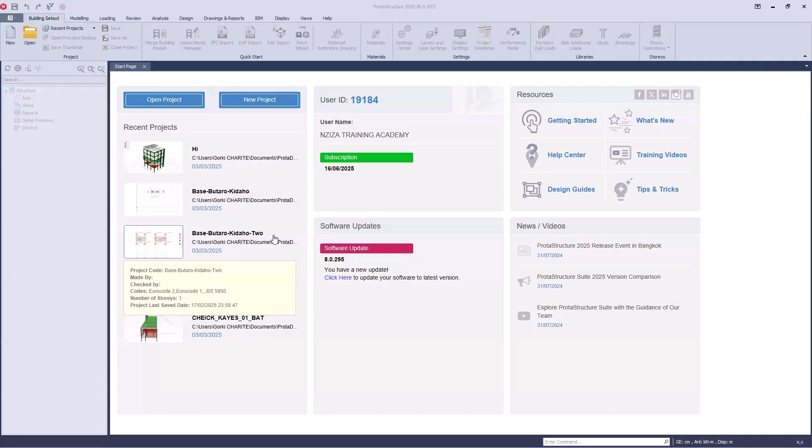Okay, so let's start by seeing the user interface of the software. Once you launch the software, it will open like this. Then, as other software, ProtaStructure has different tabs here at the top. Building setout is one tab. Modeling is another tab, loading is another tab, and so on. Whenever you open any given tab, you will see different tools here. The tools located under the loading tab are different to the ones under the modeling tab, and different to the ones in building setout.

So for now, you all know that we have different tabs, and in each tab we have different tools. We will take a look at all these tools in a few minutes. But for now, on the left side, you see that these words are somehow grayed out. They are not active because we haven't yet opened a project. I will talk about it in a few minutes.

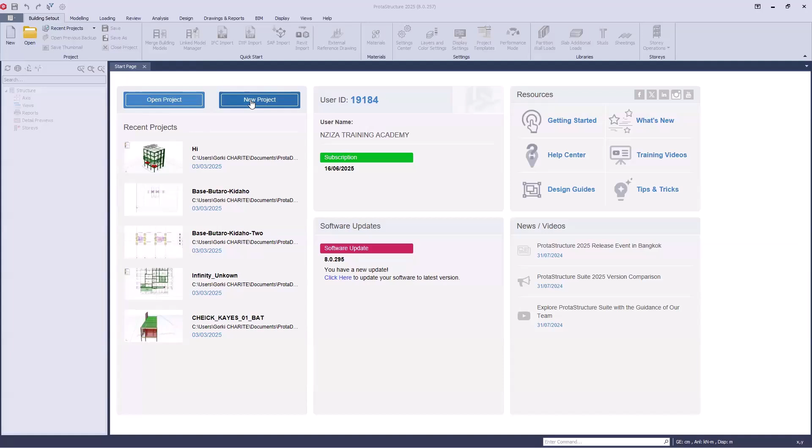So if there are no other questions, let's open a new project and see the full user interface. To open a new project, we will not use Open Project; we are going to create a new project. So please go to New Project and click this button. If you click on it, you will see this dialog box.

The first thing you have to put here is the project code. The project code is just the project name, so give it a name as you wish.

You will see that the space bar doesn't work. So if you have two words — for my case, I want to call it Training Morogoro, which is two words — to put a space between Training and Morogoro, using the space key on your keyboard will not work. If you want to put a space, you have to use this sign, the underscore. It acts like a space.

Then below, you'll see a list of different codes or templates. Depending on the code you want to use in your project, you will select one of them. For this demonstration, I'm going to select the British Standard Code. If I go all the way down, I will see United Kingdom BS code — so select the United Kingdom BS code.

So again, I will show you. We have to access the settings of the software. You have to go to the building setup, then go to the settings, settings center. Or another way.

Okay, so I understand. Some of you, because the screen of your laptops are small, have something like this. Let me try to make my screen a little bit bigger. So some of you have something like that, like this. This is because the screen of your laptop is small.

Okay, so let's go on. I was just explaining that under the building setup tab, the main tools you will find there will be about the settings. So we will go under settings center.

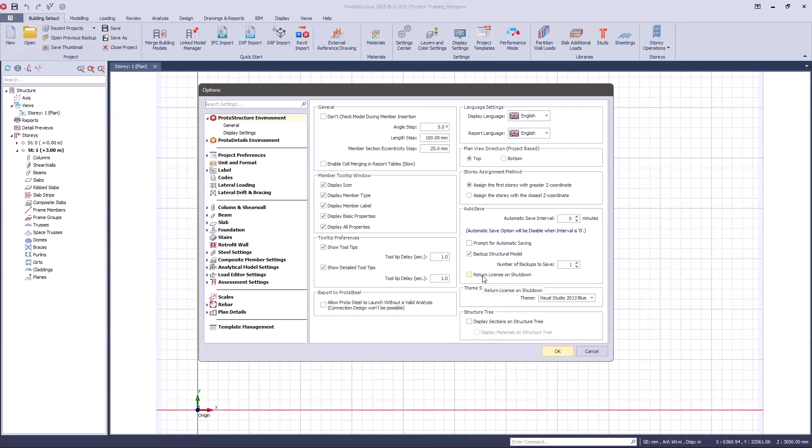So what we have done, it means the next time we will be opening the software, it will not ask you to put again the activation code. So it means when this is ticked, the return license is ticked, then every time you open the software it will ask you to put the activation code. So make sure that you have removed it so that the next time you close the software and open it again, it will not ask you for the activation.

Okay, good. So the next tab will be the modeling tab. Here, go to the modeling tab.

So the concept is, in the first tab we have set the settings. For our case, we only did this, but if you wanted, you would have gone under all the settings and set it the way you want. We're not doing that for now because we are on the starting point. We will be using default settings for now, but it is supposed that after this you set all the settings as you wish. If everything is set, then we'll shift to the modeling tab. For now, because we are beginners, let's not change anything regarding the settings.

Go to the modeling tab, click on grids. Wait a bit. Good. So let's go. Click on grid here. Then you will have this dialog box. I will put it somewhere here. This dialog box contains the properties of the command that you have selected. Again, I will repeat: I go to the modeling tab, click on grid, then you'll have these properties.

So let's start modeling our grid. Before I explain all these properties here, we'll start by creating one grid, then I'll come back and explain all these settings. To create a grid, it is very simple. Just click the starting point. You see I still have the grid command. Then click the second point, and a grid will be created. As simple as that. Click the first point, click the second point, the grid will be created. Good.

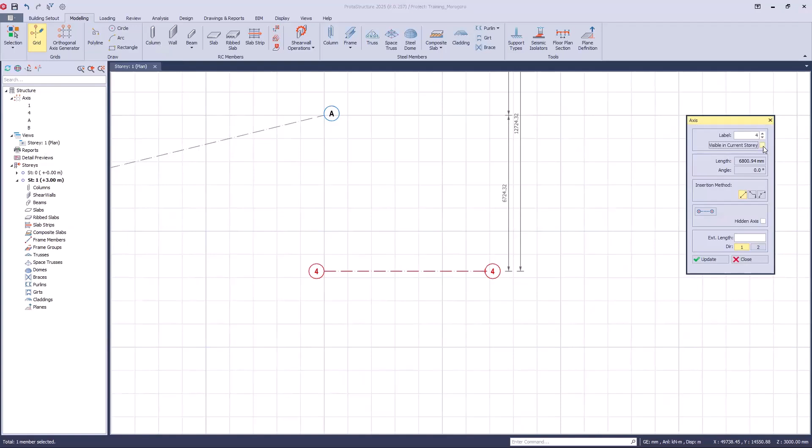To show you the difference, take a look at this grid here. For now, it is in a blue color. If I select it and click on visible in current story, you see now it is in a blue color. But if I go back here, deactivate visible in the current story, and click on update, just see the difference. You see now it is no longer in a blue color. It's like it is hidden somehow. It is not visible in this story. Okay.

Good. So depending on the project we are working on, you may want some grids to be somehow hidden in the current story. Maybe you have created those grids just as a reference, so you don't want them to appear after you do a printout of the document. So in that case, you can use this command. Okay.

So how to get the properties of this? We have different ways. You can select the grid and right click. If you right click, you will see properties. If I click on properties, then the properties of this grid will appear. I will repeat it: select a grid, right click, then go to properties. Okay.

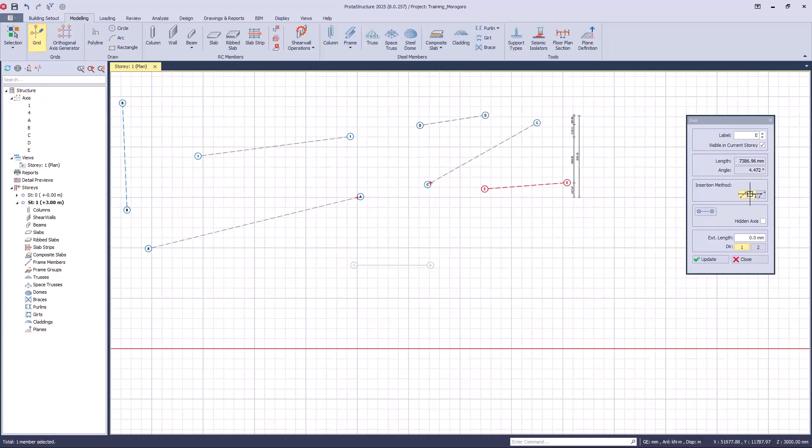Okay, so you have seen the difference between the first one, single segment, and the one which is a multi-segment. Then the last one, the third box, is curved axis. So if I activate this, I would have to take the first point, select the second point, then define the length of curvature. This is distance from here all the way to where, is it upward, is it downward? Okay, then I will click. Then I will be able to create a curved axis.

I will repeat it. Click first point, second point, then define this length here. Okay, so those are the three main insertion methods we have when we are modeling axis. Okay, so take like 2 minutes to explore on your computer. Try to draw the axis using these three options so that you can see the difference between the single segment and multi-segment and the curved axis. So please do it on your computers. Let's take 2 minutes, then I will continue explaining the remaining properties. Can you try?

Okay, so if you have a problem, online people, write it in the chat box. For the physical participants, I will be happy to assist you. Okay. Okay, so let's go on. There is no question so far. So

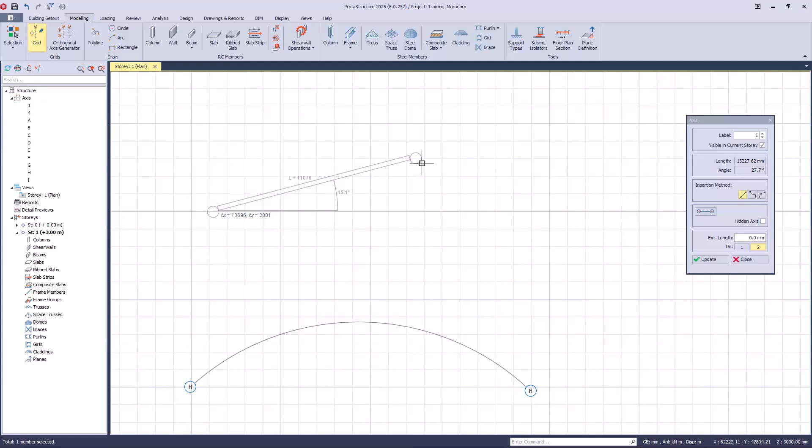After selecting the grid, selecting the insertion here, select the first point. Before selecting the second point, you'll click on the tab key on your keyboard. So if you click on tab, okay, not tab, F2 on your keyboard. If you click on F2 on your keyboard, then you can type it manually using your computer. Okay. Click on F2. If F2 doesn't work, it means depending on the arrangement of your computer, maybe you must press the function key before pressing F2. Okay. Sorry. Okay, can you try?

So press F2 on your keyboard, then you will be able to add the value of the length. If you want to change from the length to the degrees, to the angle, then you have to click tab. Okay, then if you click on tab, then you will have also the value to put the degrees, then enter, then your grid will be created. So right.

And participants, if there are any questions, let me check. Good. No questions so far. Okay, good.

So let's go on. I will repeat this last action that I demonstrated. So after choosing the grid, okay, then you have to select the first point. If you want to control the length of the axis, just press F2 on your keyboard, put the length that you want. Okay, if you want to shift from the length input to the angle, click on tab on your keyboard. You see the tab shifts between the angle and the length. Okay, then also put the value of the angle, maybe let's say 0, and click on enter, then it will be created.

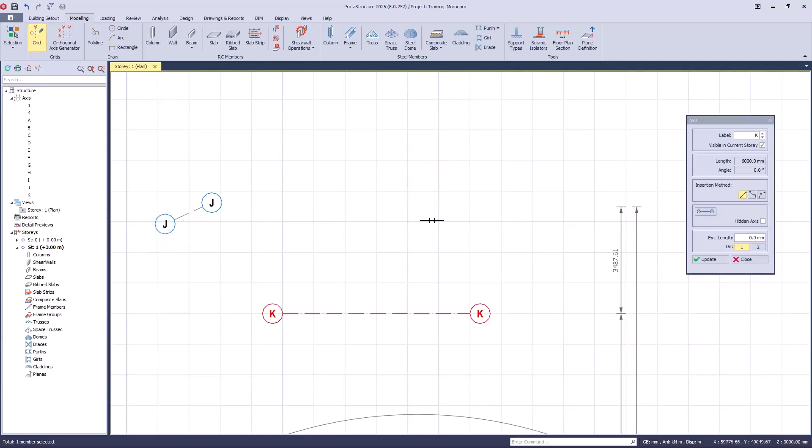Okay, another thing, okay, most of the time we are not concerned with the length of the axis, but we have to be precise with the angle. Okay, so if you want to draw a straight horizontal axis, which has 0 degrees, you have to keep in mind that in ProtaStructure we are always measuring degrees taking the x-axis, the horizontal axis, as the reference. And we measure the angle in anti-clockwise direction. So anti-clockwise direction is the positive direction. So if I click here, it will be 0. So starting all the way like this, going in anti-clockwise direction, it will be in positive directions.

So if I go all the way down, it means in clockwise direction, I will have a minus, a negative. Okay. So if you want to draw a straight axis, instead of using F2 and changing the angle to 0, you can hold down the control key. If you hold down the control key, now you are sure that this axis is straight to the horizontal axis.

If you want to create a vertical one, in order to make sure that it is well aligned at 90 degrees, you have to hold down the Control key. So if you hold down the Control key, now it will be straight. If you don't hold the Control key, you may think that it is straight, but there may be some angle.

For instance, let's take it like this. If I try to zoom or open its properties, you see now it is not exactly 90 degrees. It was almost 90 degrees. So to make sure that you create a very straight one, click the first point, hold down the Control key, then click, and now you'll be sure it is 90 degrees. Or if you are creating a horizontal one, now you'll be sure that the angle here is 0. Okay.

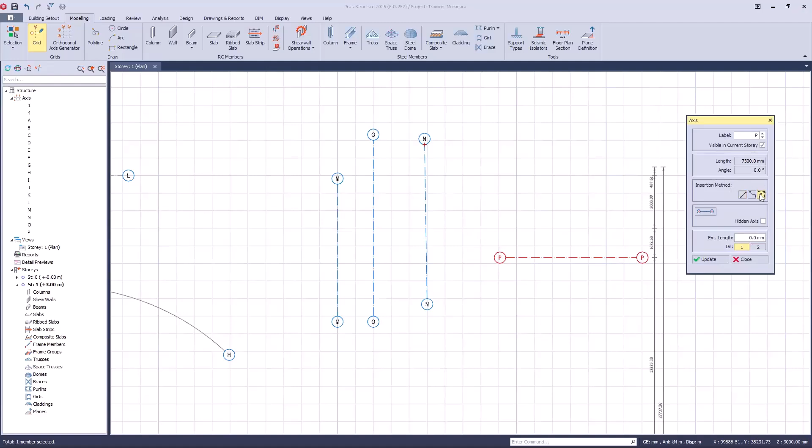So this scenario also applies when you are modeling the curved axis. You remember, for the curved axis, you have to click the first point, the second point, and then define this length. So by defining this length, you may press F2 on your keyboard, so that you can put the exact value of this length here. Okay, so you can put the exact value using F2 on your keyboard. So try it.

Different kinds of grids. Let's take around 3 minutes. Then I will go on and finish the remaining properties here of the grids. Take like 3 minutes and try to go through the grid, and then I will explain the main property.

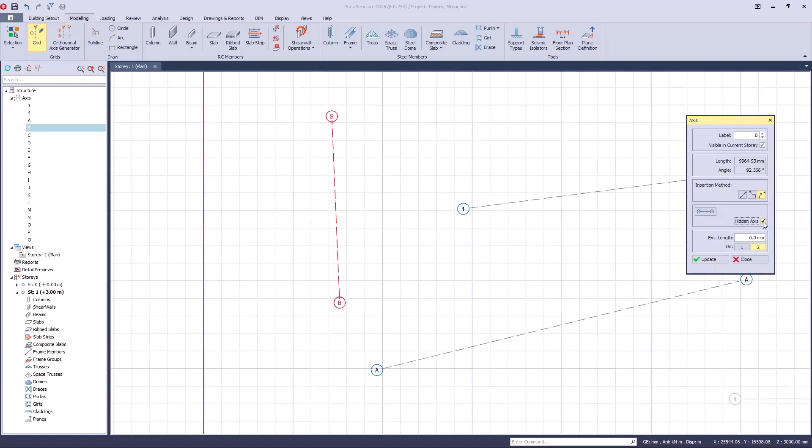Okay. So you can choose which one you want to remove. So this parameter here controls the heads of the axis. The next parameter is to hide the axis. So in this case, if you click on hidden axis and update, you see it will be grayed out, almost invisible, if I can say.

So the difference between this hidden axis and visible in current storey. If you hide using visible in current storey, the axis will be hidden only in that story. But when you choose hidden axis, then the axis will be hidden in all stories. And even when you go to detailing, that axis will not be visible. So whenever you are using an axis as a reference, you can hide it, and then it will not be visible in all stories.

Okay, this extension length, I will talk about extension length in a few minutes, when we'll be seeing how to work with orthogonal axes. I will come back to this. This direction 1 and direction 2, what you have to know: in ProtaStructure, direction 1 is always the horizontal direction, the x-axis, the x direction. The y direction, the vertical one, is direction 2. So please keep that in mind regarding direction 1 and direction 2, because we'll be meeting with it every time.

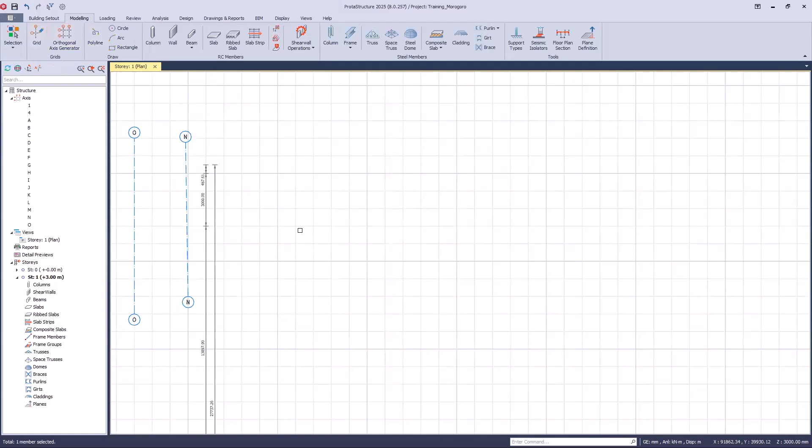That's one way. Second way is just to select it. By selecting it, you will see a delete button here. You can use that. That's another way. The third one is just selecting a grid, then click the delete key on your keyboard. Using the delete key on your keyboard, it will be deleted as well.

Okay. So if you want to delete multiple axes at a single time, you may select using a drag like this. If they are selected, then you can delete using your keyboard or by using this delete here. Click on delete. Then you will have this pop-up showing that you are going to delete the axis. Click OK. They will be deleted. Okay.

So for now, I will be deleting all the axes that I have, so that we can see how we can modify an axis. So we have seen how to draw it initially. Now we are about to see how to modify an existing axis. So if there is no question so far, then I will proceed and show you how you can modify an axis.

Okay, so how to modify an axis. So I will create an axis first. Let's say I have an axis here. Then I want to do some modification to this axis. There are a lot of modifying tools for an axis. So we're going to see them one by one. To access those modifying tools, we have again two options.

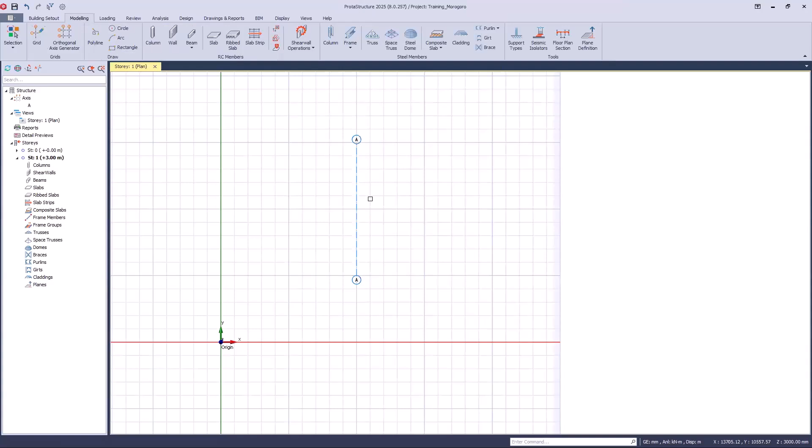The first one is the offset axis. Okay. If you click on offset axis, now you have this second axis. Do you want to offset on the right side or on the left side? You can use these values to know the exact length you are offsetting. If you want to type them manually, remember it is the same. Press F2, then you will have the option to put the distance between those two axes.

Okay, so maybe I will put 5 meters. Remember, we are working in millimeters, so if I put 5 meters, it will be 5,000. Click enter, then the second axis will be created, and you'll see that it will be named axis B because the first one was A. Automatically, it will be named axis B, but I still have the command.

So if I want to create axis C, which is also 5 meters away, it's a matter of clicking, I will still have the command activated and so on. If I want to terminate the command, just click escape on your keyboard, then the command will be terminated. Now I have created 3 axes having a distance of 5 meters, 5 meters. Good. So this was the first command, which was offset.

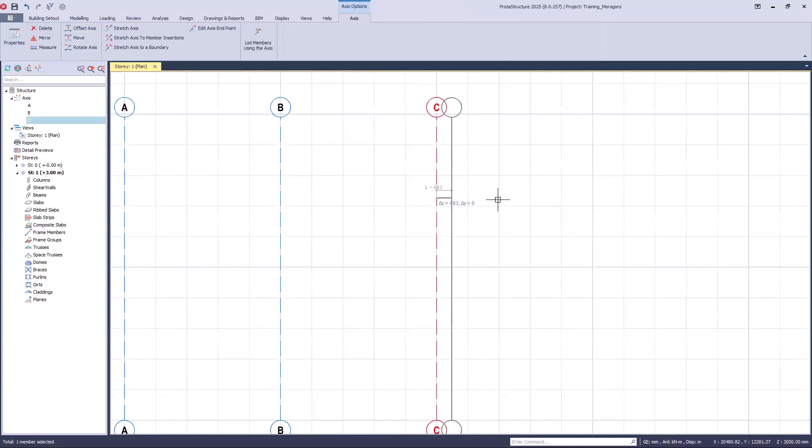But here there is a trick. I will try to offset again. Okay. So instead of offsetting an axis on the right side by 5 meters, I will offset on the left side. Maybe 2 meters on the left side. So in this case, this is very, very important. If I click F2, instead of putting 2 meters, I will put negative 2 meters, because we are going to the left side.

So I will have to put negative 2 meters, then click enter, then it will be offset like this. So when you are going to the left, it is a negative value. When you are going to the right, it will be a positive value. The same applies when you are going up or down. Moving upward, it is a positive value. Moving downward, it will be a negative value. You have to keep that in mind. Okay. That was the first modifying tool, offsetting.

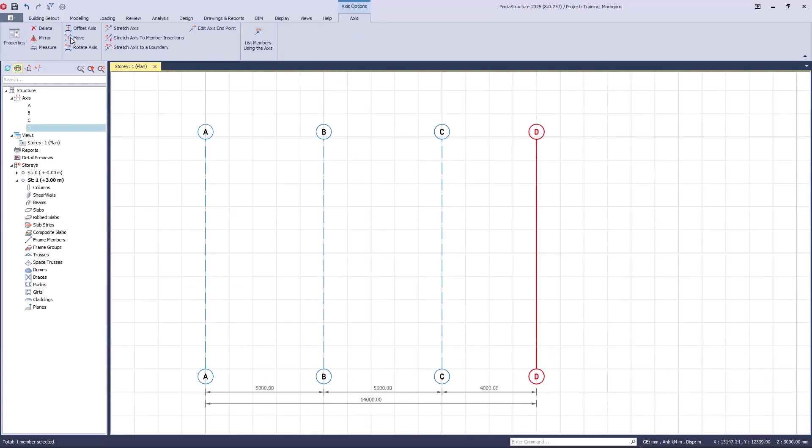Good. That's the only difference. So you can also try moving an axis. Select the axis, move, then define the length. If it is on the right side, it will be positive. If it is on the left side, it will be a negative value. Good.

So the next command will be rotating the axis. Again, select the axis, take the rotate command.

After clicking on rotate, you have to pick the base point of the rotation of your axis. I will pick maybe this as the base. I will click once, then I can start rotating. You see, I can rotate as I wish. If I click here, then the axis will be rotated.

Or we can place again F2 and fill the value. So try the rotation, and if it fails, let me know.

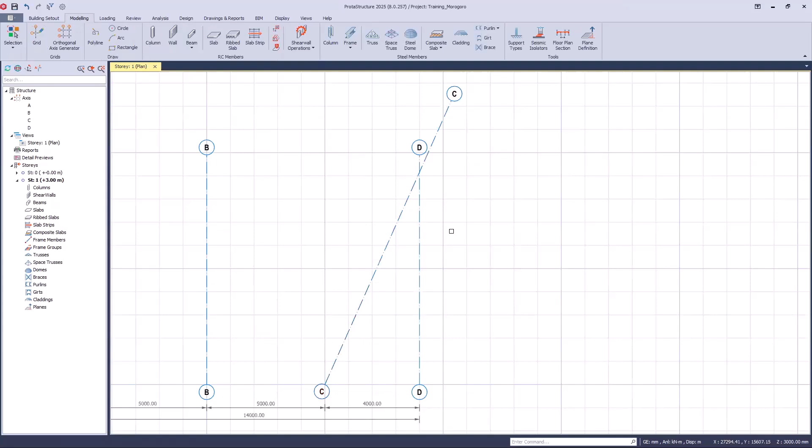Take the command, select the end where I want to stretch, this end for instance. So if I go down here, it will be shortened, or if I stretch by going up, it will be elongated like that.

This is applicable even if you select two axes at a single time. If you select them, click on stretch, it can automatically stretch two axes or multiple axes at a time, instead of stretching one by one.

Try the stretch. Is it okay? Can we move to the next one? The next one is stretch axis to member insertion.

This will not work for now, because to use this command, you have to have some members, maybe column or whatever place. We are not yet there, so we'll skip it for now.

Stretch axis to boundary. This is the same, but this can work. Let's have something like maybe something like this. Okay, so I have a member like this. I have a grid like this.

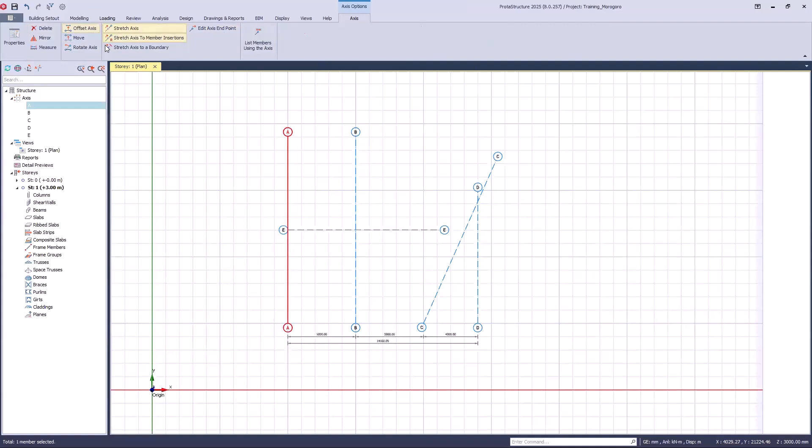Good. So, if it is okay, the last one was edit axis endpoint. We'll see it again later. So those were the main modifying tools that we will be using here.

So, is there any issue, any question regarding the modeling of axis so far? Either modeling the straight one, a curved axis, a segmented one, or modifying. Is there any question before we proceed?

Online, are we still together? For me, it's okay. Okay, good. How about others? If I don't see questions in the chat box.

But my problem is that I haven't received the software. Gilbert, you were a bit late. Maybe one of my colleagues will send you a link where you can download. David, can you please assist? Yes. Okay, good. You have, dear Gilbert, check your DM, your direct message on this chat box. Okay, I'll check. Okay, good.

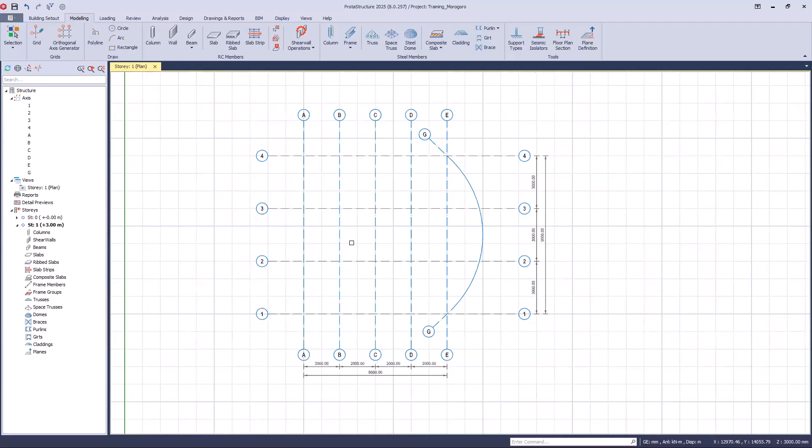Okay, good. So let's go with the last thing that I want to show you regarding the grid before we go for the break. You saw that it was not complicated to create this kind of grid, but I have realized that most of you it took you longer than necessary, because you were using like a manual way of modeling these axes.

What you did: you created the first axis, and then you tried to offset it, like 2 meters, I think. Then you offset it like this, then you drew something like this and offset it, and so on. That's how you did, and it was good, that's what I wanted to do. But I want to show you that there is an easier way of creating this kind of axis.

Instead of using a grid axis, the one that we have learned, we are going to see how to create an orthogonal axis generator, to create our axis using the orthogonal axis generator. This command will allow you to create a set of axes with a single click.

So how is it used? You have to go under Modeling, select the command Orthogonal Axis Generator. After selecting it, bring your cursor to the display and click somewhere you want. Maybe at this point, I'm going to click here. If you click somewhere, then you'll have a table. I'm going to explain this table so that you can understand what is behind the orthogonal axis generator.

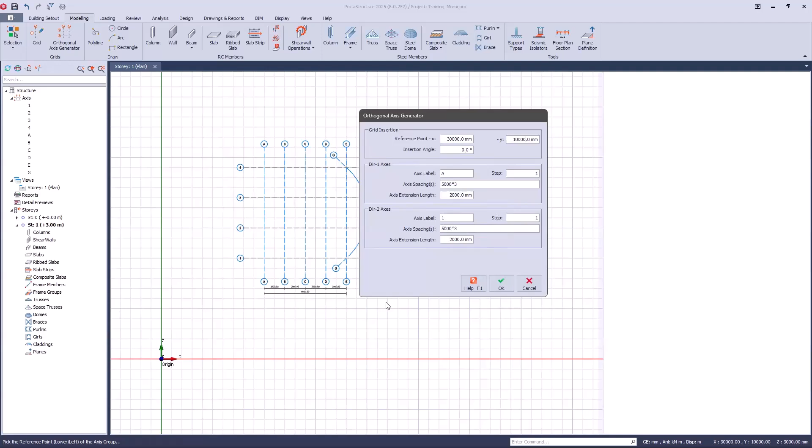So whenever you have this table, you have to take into account the parameters of direction 1 and the parameters of direction 2. Remember, direction 1 is always the x-axis, the horizontal. Direction 2 is the vertical axis. It means the settings I will be working on here will be for direction 1, which is these axes in the x direction. Then when I set the parameters of direction 2, I will be working on these which are vertical.

So I will zoom this again and repeat so it will be much clearer. I want to drag this almost here. You see, direction 1 here I have numbers, then direction 2 I have letters. You see, this A, B, C, D, and so on. So these are letters, and these are numbers.

So what I have to do under direction 1, it means these which are horizontal, under axis label, I have to put numbers. So I will put 1 instead of A, under label.

Please follow here. Okay, the next one is the spacing. I'm going first to work on direction 1 only. For direction 1, the label will be 1 to mean numbers, so I have put 1 to mean numbers.

Then I have the next point, which is axis spacing. It means the distance between one axis and another. So from axis 1 to axis 2, we have 3 meters, so I have to put 3 meters, which is 3000 millimeters.

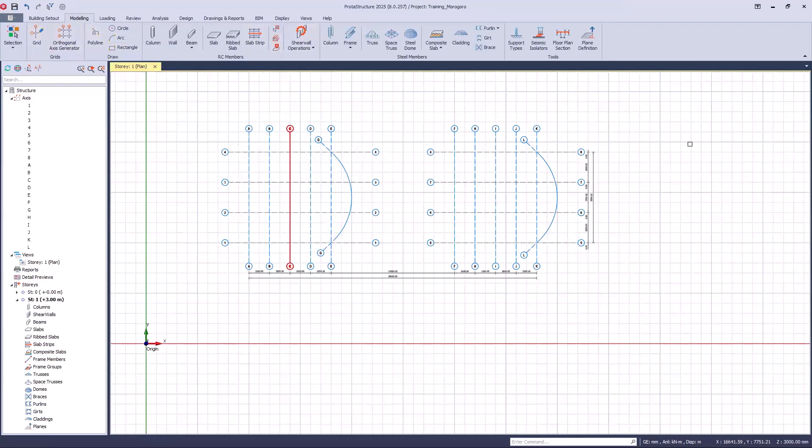Okay, so whenever you are dealing with creating those kinds of grid axes, you may use the orthogonal axis generator or this independent grid, depending on the result you want to achieve. The last thing I can tell you about this orthogonal axis generator, remember when we skipped this angle? For the angle, if I put, let's say, 45 degrees and click OK, you see it creates the axis but with an inclination of 45 degrees.

Okay, so if you are working with this orthogonal axis generator, but you know the distances are not always equal between axes, you have to put them here manually. So the first one is 3 meters, maybe the second spacing is 2 meters, the next one maybe 4 meters, and so on. You can come here and do the same. This time, if you click OK, you see the spacing between these grids are different: the first one was 3 meters, 2 meters, then the last one 4 meters.

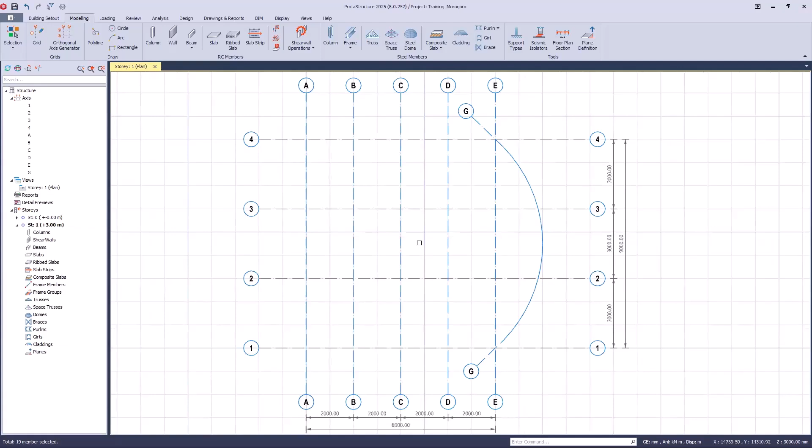Okay, so it is possible, but you do it in ProtaDetails. Here in class, they were asking, is there a way of changing this axis? The appearance not to be a dotted line, maybe one continuous line. Yes, it's possible. I will show you when we move to ProtaDetails. But it is possible.

So let's go on and start modeling. We are going to start modeling starting with columns. After modeling the grids, the next one is the column. As we explained earlier, when we want to do modeling, you have to go to the modeling tab. So if I want to model a column, I must make sure that first of all I'm in the modeling tab.

Then the next commands here, these draw commands, are used just to draw lines. You may draw a polyline, a circle, an arc. For instance, if I click on circle, see, it is just a line that I'm drawing. Or I can draw a polyline like so. You can draw a rectangle. Those are just lines. For now, know that if you want to draw any type of line, you may use these commands here.

So for now, I'm just going to delete this. We will see the use of drawing those lines in the coming sessions. For now, we are interested in the columns. As I have shown you in the presentation, ProtaStructure has the ability to model either reinforced concrete members or steel members.

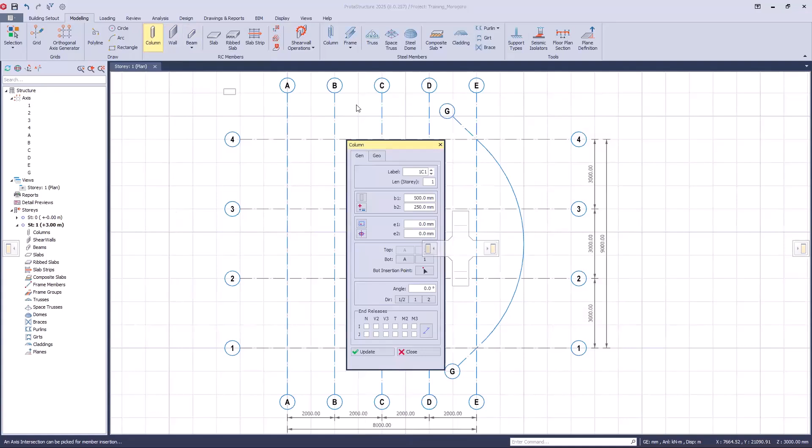Again, we will have a property for columns. You remember even for the grids we had something like this. So each command you select in ProtaStructure will bring this property dialog box. So again, as we did for the grids, I'm going first of all to show you how to place a column. Then later on, I will go through all these settings and explain everything here.

So if I want to place a column, it is very simple because ProtaStructure has a very user-friendly interface. Just by selecting column, then you do some modification in the properties as you wish. If everything is okay on this side, then you come to the intersection of axes. Whenever you go to the intersection of axes, you can see the preview of the column. So if I come to the intersection and left click once, the column will be placed. As simple as that.

You see this is an axis; you cannot place a column somewhere here. To place a column, you must always have the intersection of at least two grids. So if I try to place a column here, it will not be placed. But because this is an intersection here, if I place it, it will be placed. As simple as that. Place at every intersection where you want to put the columns, of course.

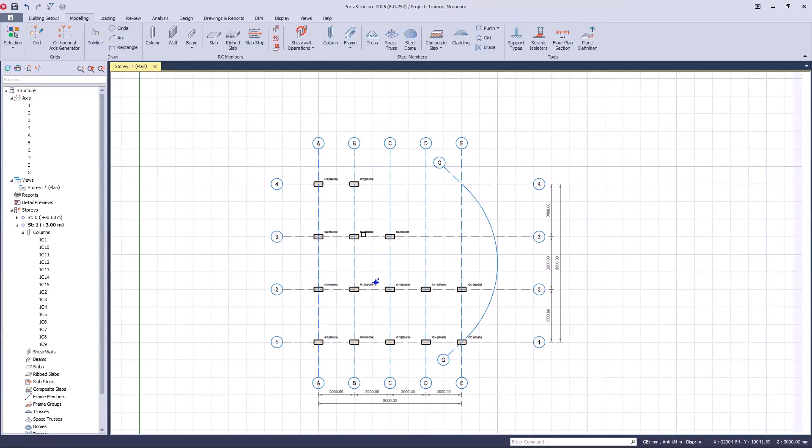Then if I close this, to delete a column, it is like on the axis: you can select, right click, then delete. This is one option. You can select and you see the delete here at the top. Or you can select and delete using your keyboard as we did for the grid. Another option, you can select multiple. For instance, if I select this and I want to select this as well in addition, you have to hold down the Control key and select. Now you see that these two are selected. If I want to add another one here, hold down the Control key, select, and now these three are selected. And I can delete using the key.

Like in AutoCAD, when you are selecting using this drag command, selecting from right to left is different from selecting from left to right. We saw that here we have many attendees who are familiar with AutoCAD. So, for instance, if I select from left to right, I have to cover the entire portion of the column for it to be selected. Let me do an example. I have to select the whole column for it to be selected. If I select only a portion of a column, it will not be selected.

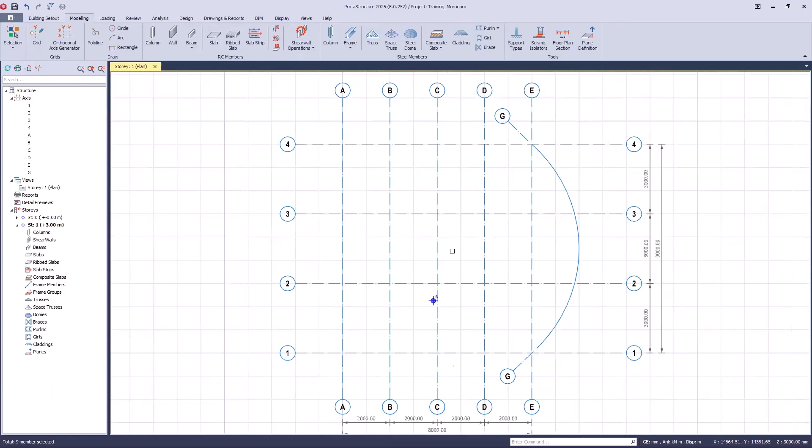So if placing columns is okay, now let's see all the settings, the properties of a column. So I will again take the column command. Now we are going to see all these settings here.

The first one is the label. Okay, the label, you are already familiar with labeling. It means the name of a column. So the first one, if I place a column, it will be named as 1C1. Okay, so for instance, if I come here and place a column, the name of the column is 1C1.

Okay, what does this mean? The number one here in the front means that we are on story 1. The letter C means that it is a column; it is the abbreviation of column. So when we will be modeling, let's say a beam, it will be B instead of C. Then the one on the right side means it is the first column on story 1.

So if I place another one, it will be named as 1C2. It means the story is still 1, but this is the second column. This was the first, this was the second. And then in parentheses, we'll have the cross section of the column, which means we have 500 by 250. So this is the labeling. Whenever you see this label, just know that it's naming, and as long as you are placing columns, this labeling 2, 3, 4 will be updated automatically.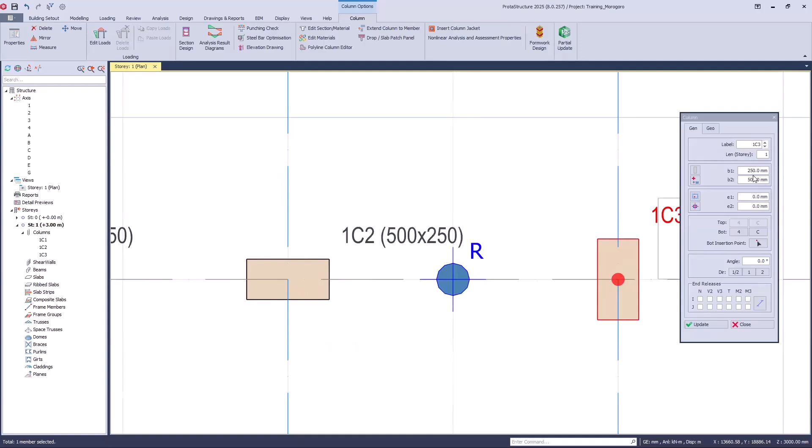Good. So let's take a look at E1 and E2. E1 and E2 here stand for eccentricity. We have eccentricity in horizontal direction and eccentricity in vertical direction. To demonstrate this, I will use this column here. You can see that it is placed with the centroid in the middle of the column, which means we don't have any eccentricity.

But if I go to eccentricity 1, you remember it is in the horizontal direction. If I put, let's say, 50 and update, you see how the column has moved to the right. So I have applied eccentricity. It means the center of the column is no longer at the intersection of the grids. If I wanted to move the column to the left with eccentricity of 50, then I have to put a negative sign because I'm moving to the left.

The eccentricity depends on the architectural model; depending on where you want to put the column, it is not always placed with the center at the intersection of the axes. So depending on what you want to achieve, you may put eccentricity, move it to the left or to the right, upwards or downwards. So if I wanted to move it to the left, then I would have put it negative. Otherwise it will move to the right.

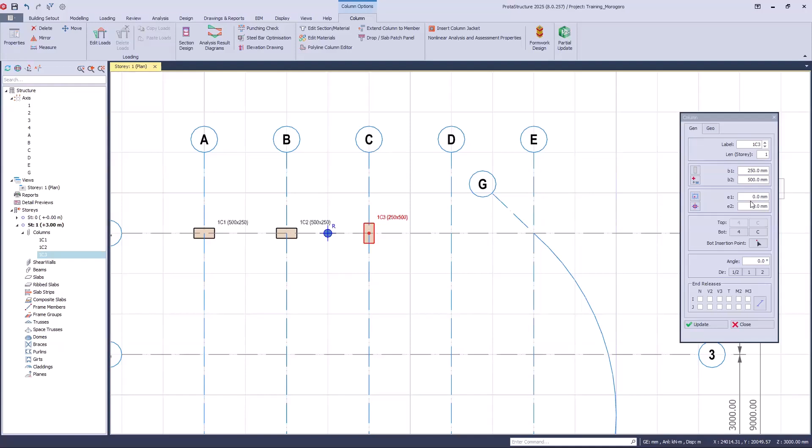Good. So ProtaStructure is very flexible when it comes to the geometry of the columns. So you are able to place columns which have any kind of shape. Okay. This was just a rectangular column. If you want to place a square, it means B1 and B2 are equal. So it's a matter of filling here, and you will have a square column.

If you want to place a circular column, again, take the column command. It's a matter of coming to this B1 and putting the diameter of that column. Then on B2 you have to put the value 0, and then you have a circular column.

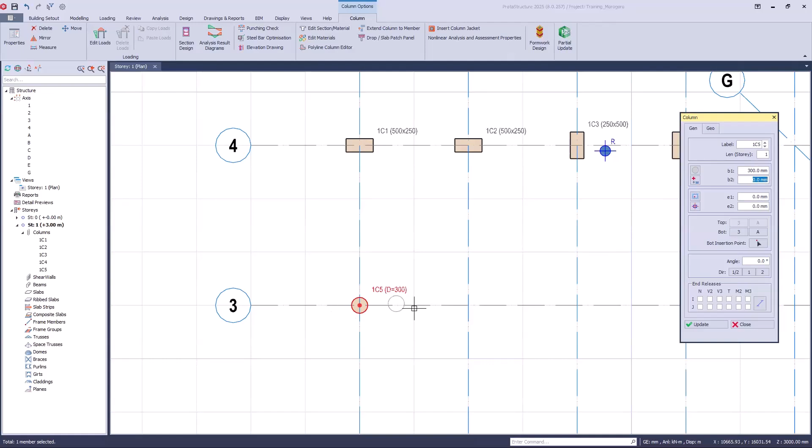Okay, so I'll repeat it. To have a circular column, you will have to use B1 and put the value. This value is the diameter of the circular column. Then B2 must be 0. If B2 is 0, automatically this will become a circular column. Good.

So we have placed a rectangular one, a square one, and a circular one. Let's see how to place other types of columns. So if I again come to the columns, ProtaStructure gives us the flexibility to add other kinds of columns. So if you come here, you will see this section member icon here at the top. This one at the top, it is called section member. Are you able to see this section member?

Click on it and you will have this box. You see, you can change. You have a rectangular column here. You have a circular column. You can have this cross column. For instance, if I choose this kind of shape, I can use these values to adjust the size. You can see even the labels here. Adjust as you wish here.

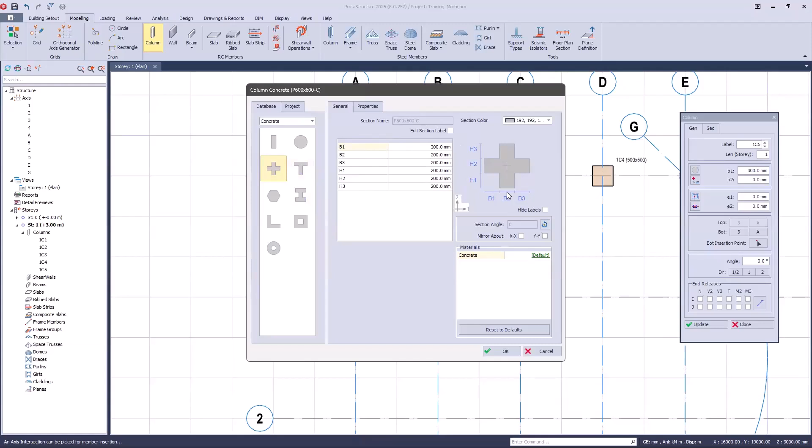B1 is from this end to this end. B2 from this end to this end, and so on. You can use this figure to figure out the exact position of these letters here. So if everything is okay, it's set. If I click on OK, now if I place, you see now I have that shape of column.

Great. We have also other kinds of shapes here. Maybe another shape. Then you can come and place the column as you wish. So you can explore all of this. Can you try it? Can you try different shapes and see if it is working for you on your side? If yes, then I will proceed. So take like 2 minutes and explore all those shapes of columns.

Indeed, okay, can I proceed? Okay, so you see how ProtaStructure is very, very flexible when it comes to modeling of columns. Good. Then let's go on and explore the remaining parameters here.

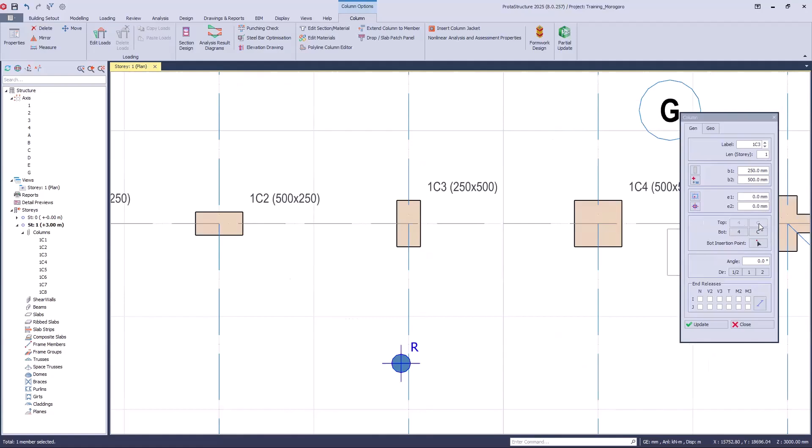Okay, so if I check, I have selected this column here. So at the top my column is connected on grid 4 and C. Here it is written 4, here it is written C. It means this column is at grid C and grid 4. That's where the top of the column is attached.

The same goes for the bottom. So if the top and the bottom are the same, it means your column is standing straight. Good. So we are going to see how to create a slanted column, because so far what we have created, these 5 are only straight columns.

So for you to view it very clearly, let's see what we have modeled so far in a 3D view, because you can model in 3D view and in plan view, for you to understand it better. So how to open a 3D view? We have different ways. So I will show you all of them. Then you will have to judge yourself and see the easiest one.

The first one is by going to the View tab. If you go to the View tab, then here you will see where it is written 3D physical model. Not 3D analytical model, 3D physical model. So if you click on 3D physical model, now you will be able to open your 3D.

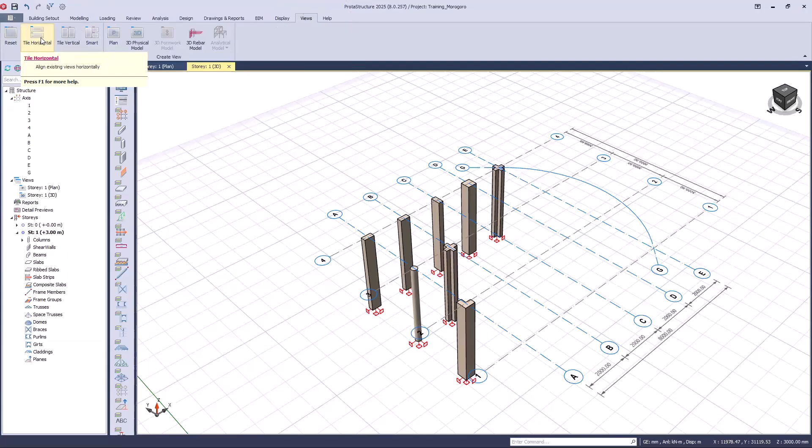So depending on what you want to achieve or the complexity of your project, you may also want to view the plan view and the 3D view at the same time. Okay, it is also possible. Again, it is still under this View tab here. Under Windows, I can tile my windows horizontally, for instance. If I click on horizontal, now I will be able to have the plan view at the top and the 3D view at the bottom.

Okay. Or I can decide to tile them vertically. In that case, I will have the plan view on the left and the 3D view on the right. Okay. Are we together so far? So these are two different views, okay? But they are all connected together. It means any change you do on one side will automatically reflect on the other side.

So again, in ProtaStructure, you can always choose to model in a plan view or in a 3D view. For instance, if I come here and go to the modeling tab again, select the column. Okay. So if I try to model here in a 3D view, I can place a column here. You see it is placed here, and automatically in the plan view it is also placed. If I put another one here, you see it is also placed here. So you are free to work in a plan view or a 3D view.

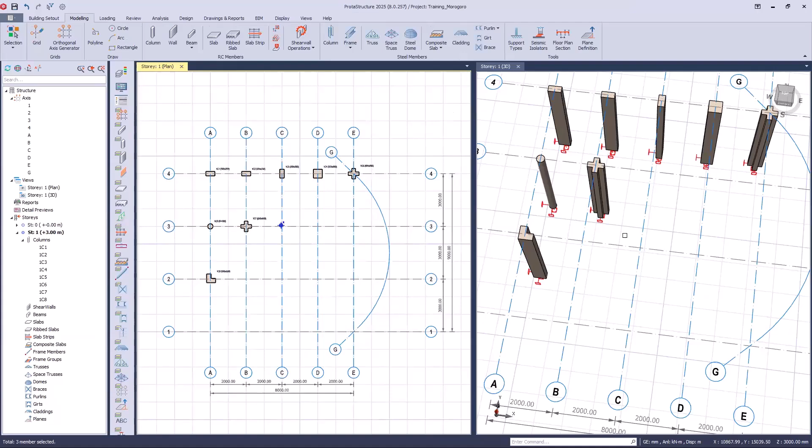So if I want to reset the plans the way they were before, again, it is under the View tab. Okay, instead of tiling, now I will reset. I click on reset, then I will again have one tile, okay, either for the plan view or for the 3D view. Good.

Can you try on your side? Try to open a 3D view. Try to tile the views so that you may have something like this. Okay. And also try to model some columns in a 3D view to see if you will be able to model in a 3D view. If everything is okay, then I will go on. So take like 2 minutes and do practice on your computer.

So is everything okay? Virtual participants, I hope everything is okay so far. Okay, good. So let's go on.

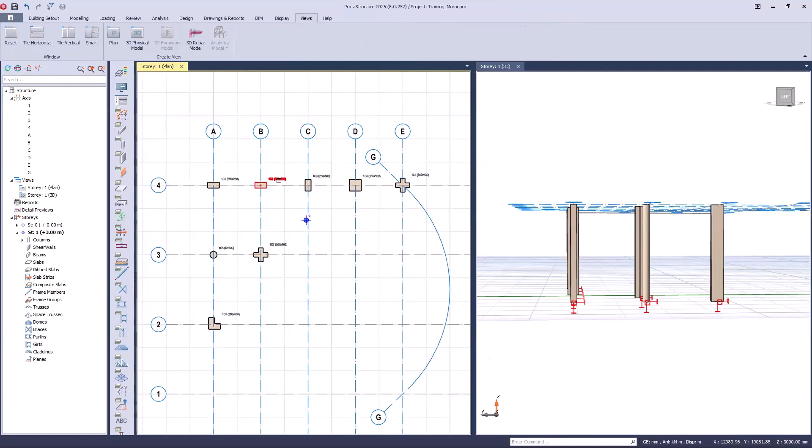First of all, you must keep in mind that the top end of your column must be attached to the intersection of two grids. The same goes for the bottom side, okay? So it means if I want to slant a column, I must have the intersection of grids where the bottom part will sit, and I must have an intersection of grids where the top side will be fixed.

So how to do so? I go to the modeling, take the column, okay, turn on the column properties. Make sure you take the shape, okay. Then I'm going to come and place a column somewhere here. Okay.

Before placing this column, keep in mind that when drawing a slant column, the top part is always fixed. The bottom part is the one we will be moving. So if I place a column here, this will be the top part. I cannot move the top part, only the bottom part, because I want to slant from here all the way there. In 3D view, this bottom part will be at this point, so it will be slanting this way.

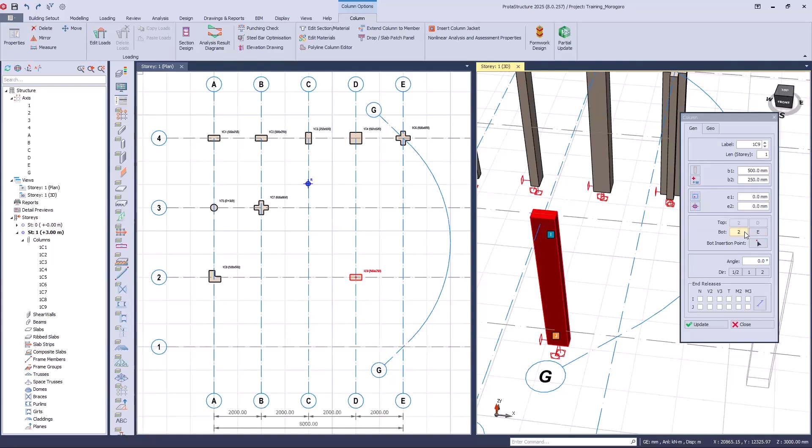I'll repeat it before we practice. If I want to move this column to slant it, I cannot move the top part, only the bottom part will be moved. So how to do so? Open the property, then using this bottom insertion point, select it, and click where you want to move the bottom side. For my case, it is this point, so I click there. Then I double check if the bottom coordinates have changed. Yes, they have changed. Then I click on update, and it will be slanted.

So can you try? Take like 5 or 3 minutes to try this. Online people, if you meet any problem, write it in the chat box. I'm going to support the physical participants here. In the meantime, try to model this slant column like this.

For the physical participants, we are all okay with the slanting column. How about online people, is everything okay on your end? Romeo is okay. I'll be okay too. Mariana, how about you, can you confirm if everything is okay? Mariana, okay, good. Chedi? Are you there, Chedi? We are waiting for your confirmation if everything is okay. Even Isaac, Isaac how about you? My side, everything is okay. Okay Isaac, good. So Chedi, can you please confirm? Chedi. I think Chedi is not around. Once he comes back, maybe he'll let us know if everything is okay. So let's continue for now.

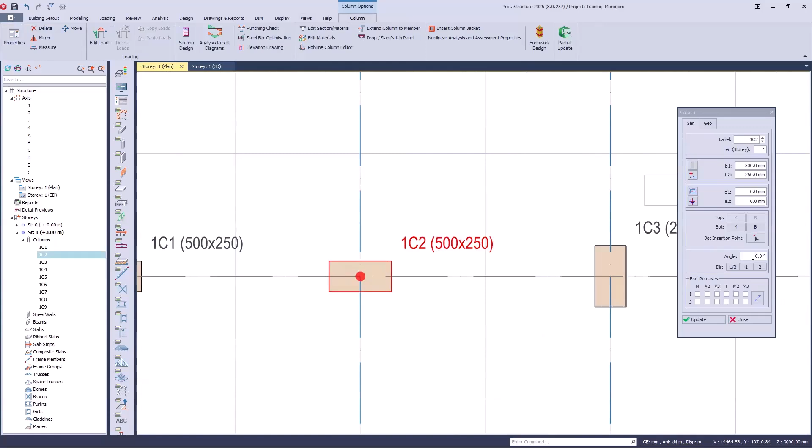I'll take an example with this column here. Let me reset the view so it's like this. If I select this column, column 2, and open the property, I'm going to change the angle. If I put 90, you see how the column was looking before, but if I click on update, now you see it has been rotated 90 degrees. If I put 45 and click update, then it will be rotated 45 degrees. So this is simply the meaning of this angle - you can rotate the geometry of your column as you wish.

This end release, we'll come back to it later - it's much more concerned with the analysis rather than modeling. Allow me to go to the next tab, because this property of the column has two tabs. All the settings we were dealing with were under the general tab. So let's move to the geometric tab. If you click there, you will see additional properties. So the first ones were under general, then go to the geo tab, and you'll see the other settings there.

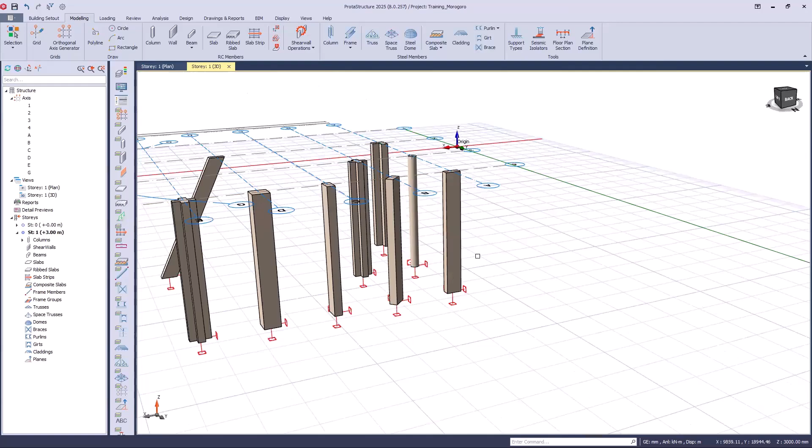So if you want to elongate a bit or shorten a bit this column, then you have to go to its property under the geo tab. Then we will be using this delta Z.

Let's start by demonstrating it using the top side here. So if I go to the delta Z top, it means I want to elongate or shorten this top part. So if I want to elongate, let's say by 1 meter, I come to delta Z top, then put 1 meter, and then update.

You see now how this column is longer than the remaining ones. It means it has been elongated 1 meter above. So it means before it was 3 meters, now it is 4 meters.

I can decide to make it shorter. In that case, I will still use this top part, but I will put the negative sign because we are going down. If I update, now it is 1 meter shorter compared to the remaining ones.

So if I wanted to do these changes but at the bottom side, in that case I would have used the delta Z bottom. I should have used the delta Z bottom.

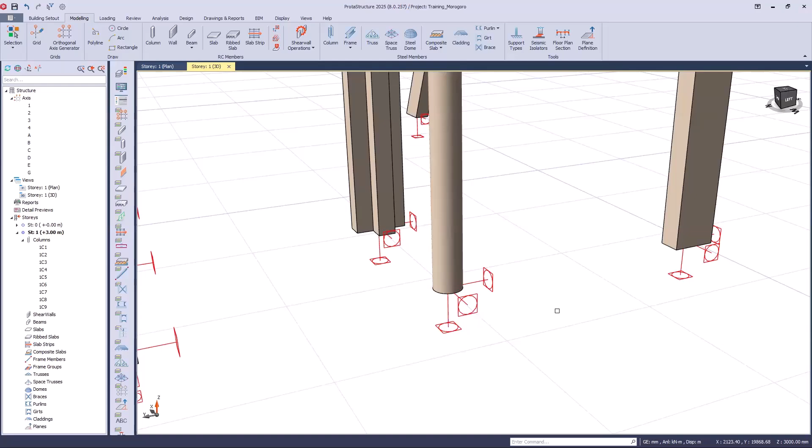So by default, all the columns, all the story 1 columns in ProtaStructure, they will be by default fixed.

But in a scenario where you want to have another type of support, you can always create the support, then assign it to the column. So that's what we are going to see. Before assigning to the column, you have to create it. So how to create another type of support? That's what we are going to see.

It is under the modeling tab. Under this modeling tab, go to tools, then go to support type. You will see support type. Click on support type. It is the last one under tools.

So this support type definition will open, and you can see we have only one type, which is default. That's why all the columns here that I have modeled have this default support. And if you check on this default, it is fixed in both directions. So if you want to create another type of support, it's a matter of just clicking on this plus icon to create a new support.

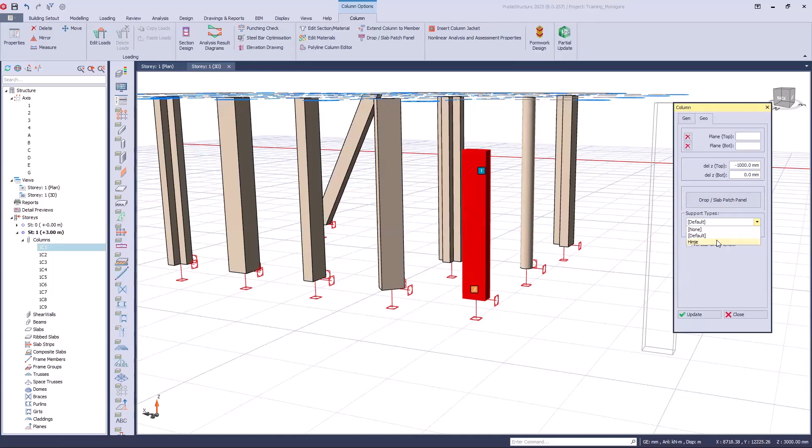So if I want to assign that support type to a given column, what I will have to do is select the column where I want to apply the created support. Go to the property, all the way to the geo, under the support type. Now if I select, I will be able to see the one which I created. So if I click there and click on update, now you see the support type has changed from fixed to hinge support.

That's how you can create this support. That's how you can create another kind of support and assign that support to the column.

To assign is just a matter of selecting a column, go to the property, then under the geometric tab, yes, you will see support type. Click there, then you will see what you have created. And remember to update after changing. That's how you can assign a support.

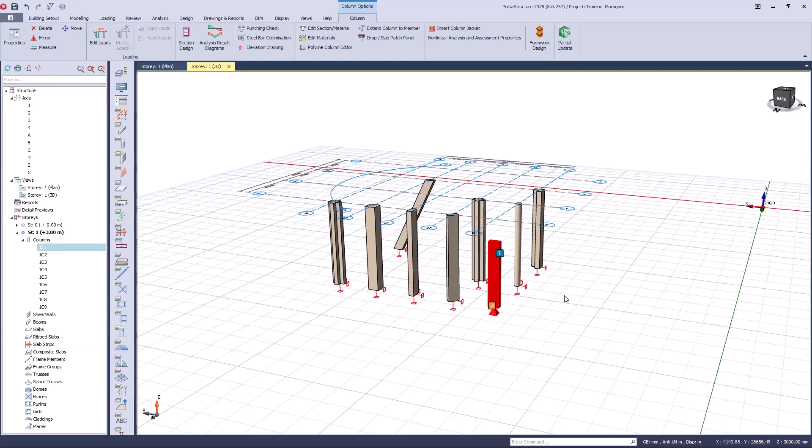Okay, so is there any question regarding these properties or even the modeling of the column?

Okay, I think everything is okay. So before we proceed to the shear wall, the last thing I want to show you on the column is how you can model an irregular column. Because you remember when we were seeing these column sections, these are the only ones present. So what if you want to design a column which has an irregular shape that is not appearing on the list here?

Okay, so it is a more advanced topic, but I believe that you must know how to model it. Maybe analysis and design should be for the advanced part, but it is better if you know how to model such kinds of columns. So how can you achieve that? First of all, you have to draw the irregular shape of the column. So let's go to the modeling.

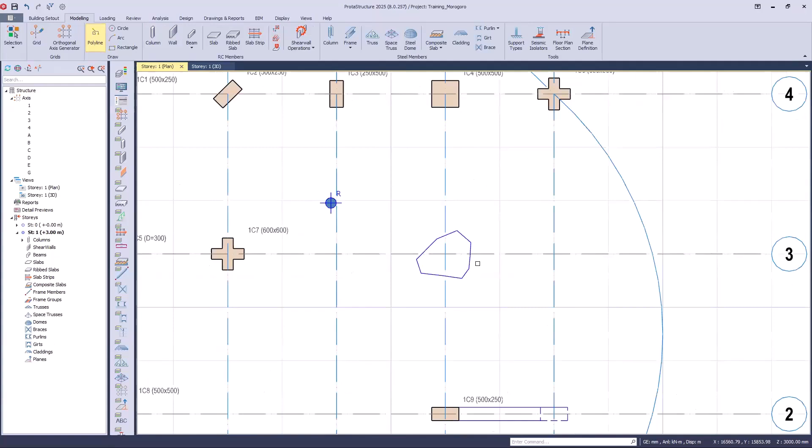So you see these are just lines that I have created. If I go to the 3D view, you'll see that it's just a line. So create lines forming the irregular shape that you have. Then after creating this, I want to make a column which has this kind of shape. In that case, it's very simple.

It's just a matter of selecting these polylines. Select, right click, and then you'll see convert to column. If you click on convert to column and place it in the center, then it will be a column instead of a line. So if I go to the 3D view, now it has been transformed into a column. You can see how it is. As simple as that, you have created an irregular shape of a column.

Okay, try it. Just using lines, create an irregular shape. Then select those lines, right click, convert to column. Then place the column. Remember, to place the column, you have to have an intersection of axes. That's why if I open the property of this column, you see that I must have an intersection of axes for it to work.

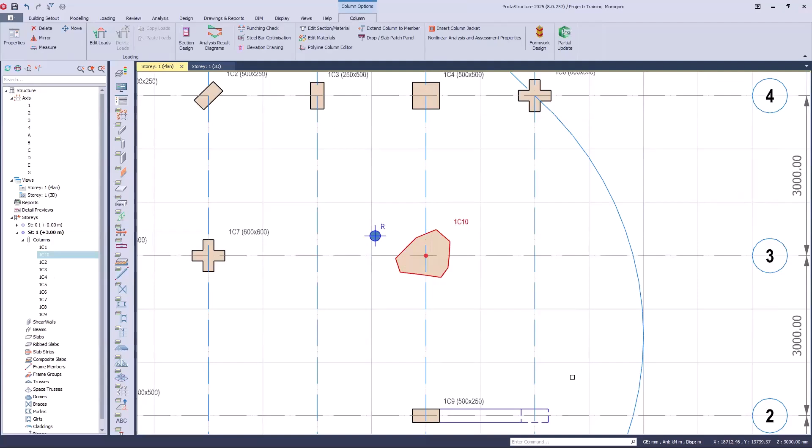So you can see that you may do an irregular shape, let's say something like this, maybe. Then select, right click, convert to column, then place. It will be placed. Good. So that's how you can model a column.

Good. So let's go on and work on the shear wall. We are done with the column modeling. Now let's start the wall modeling. Wall modeling is similar to the column with a small difference. So let's model the shear wall, the masonry or concrete wall. Let's go to the modeling, then take the command for the wall. Again, you will have a property dialog box related to the wall.

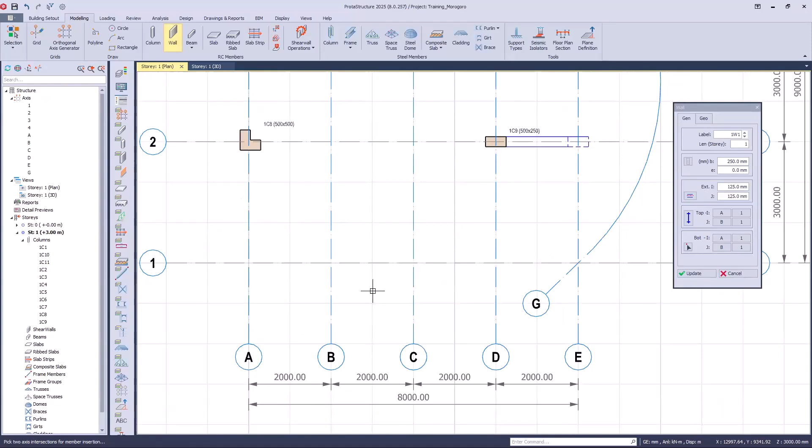So, in order to draw a wall, you must have an intersection of axes at the starting point of the wall. You must also have an intersection of axes at the end of the wall. So if the wall is starting here and ending here, I must have an intersection of axes at the starting point and at the end point. Then I can draw from the start all the way to the end, and the wall will be created.

Simply like that. So for instance, if I start a wall here, I cannot end it in the middle here. See, it will give me a warning. That's because at the end here, there is no intersection of axes. So if I go to the 3D view, you will see the shear wall created like this.

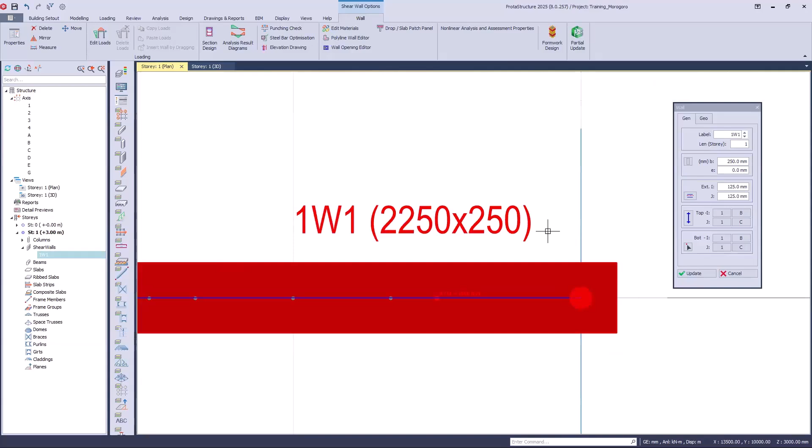Then L story, the length of story. We skipped this for the column as well, because we'll be seeing it after knowing how to create other stories, other floors. So I will do the same for the walls for now.

Now we have B. B is the width, the distance from this corner here all the way to this one. So the width of the wall. So it is 250. So if I change and put 300 and update, you see it has been updated as well. Okay, so it is just this.

Then we have E, which is eccentricity. You are already aware of eccentricity; we talked about it on the column side. So again, if I put 50 as eccentricity and click on update, you see how the wall has shifted upward here. So the center of the wall is no longer aligned with this grid because I have put in eccentricity. If I bring it back to 0, then the centroid of the wall will line up with the center of this axis, which is good.

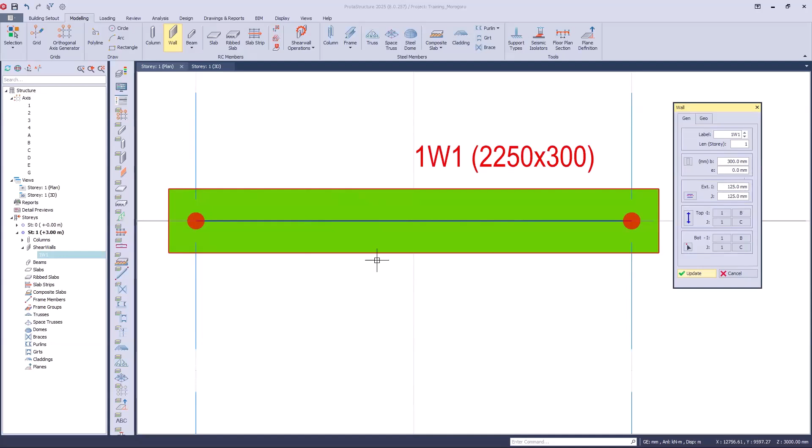I have an extension, which is 125 millimeter. So what does this mean? It is an extension from the end of the axis. Because the intersection of the axis was supposed to be at this center. But you see there is a distance here, an extension which has been created. The length of this extension is here.

So if I put 0, for instance, and update, you see now I no longer have an extension from the grid, but still here at the J end, I do have an extension. If I come to the J end, put 0, update, now I no longer have the extension. So that's the meaning of these extensions. You can decide to remove them or put them depending on the scenario that you have.

So let's try. I will delete this and I will create the wall again with those extensions. I will create one wall here and another one here. But I'm going to remove those extensions. So to demonstrate how it will look, I will select this. I will remove also these extensions.

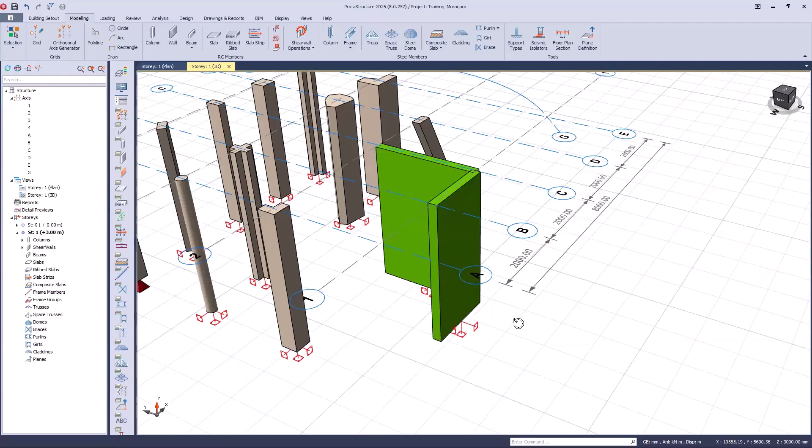You see how the intersection is here, because this vertical wall is ending at this grid, no extension. The same goes for this. So you see there is like a small gap here. If I go to the 3D view, you see how the connection looks. Okay. However, if I put those extensions

on this, and I put it on this as well, update. Now in the 3D view, you see how the connection is. So by default, when you use the wall command, it automatically comes with the extension, and the extension is half of the width. But you always have the flexibility to manipulate it as you wish. Okay.

Is it okay with the wall so far? Okay. So online people, is it okay so far? Yes, good. So good, I see that everything is okay so far. Can you please try?

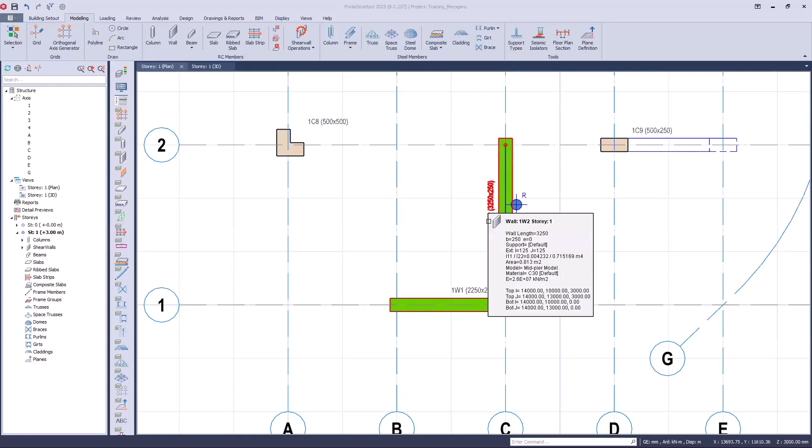You can see there is a question online. Yes, it is okay, but what happens if some overlap seems to appear? That's how it appears in the modeling; it's like there is an overlap. I will show you in a session to come how you can combine these two walls and make them like one single core wall. I will demonstrate it, Mr. Chedi, in a few minutes.

So please, for now, try to create a slant shear wall. Okay, good. Try and see if you will be able to figure it out. Let's take like 5 minutes and try to model it. People online, were you able to do that? Some here physically were able, others not. It's okay. So let's try to demonstrate it.

So to create a slant wall, take a look here. It is almost similar to the column. All you have to do is understand, first of all, that this wall must be lying on an axis. It means at the starting point we must have an intersection of axes, and at the end point. So select just the wall, open the property of the wall.

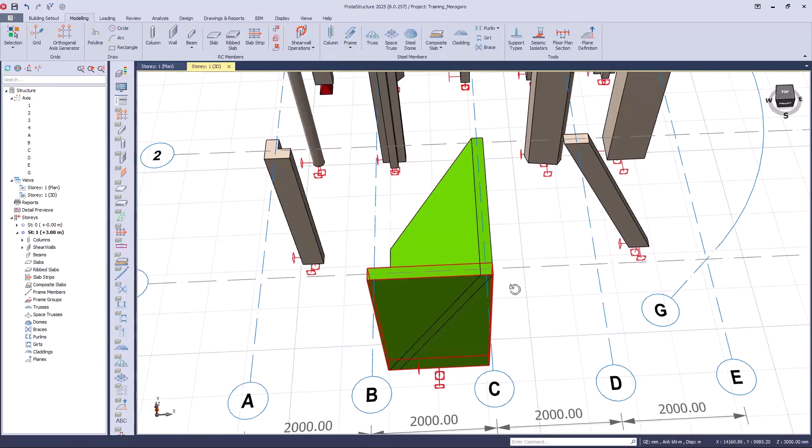So if I pick one axis, now you see it has changed here. If I click on update, you see it has been slanted. If I open the 3D view, let me delete this for a better view. Now you see it has been slanted. That's what you had to do. So I will repeat it again.

I have to select the wall, right click, open the property. Then using this bottom insertion point here, I click on it once. And then instead of selecting the two corners, I will just select only one axis where the bottom part will move to. Then click on update. Then I will have a slant shear wall.

Shady, you managed to create a slant shear wall. Yeah, that's good. Congratulations. Romeo, you were not, but I think now you have seen how you can create a slant column. So try it on your computer and see if it is feasible.

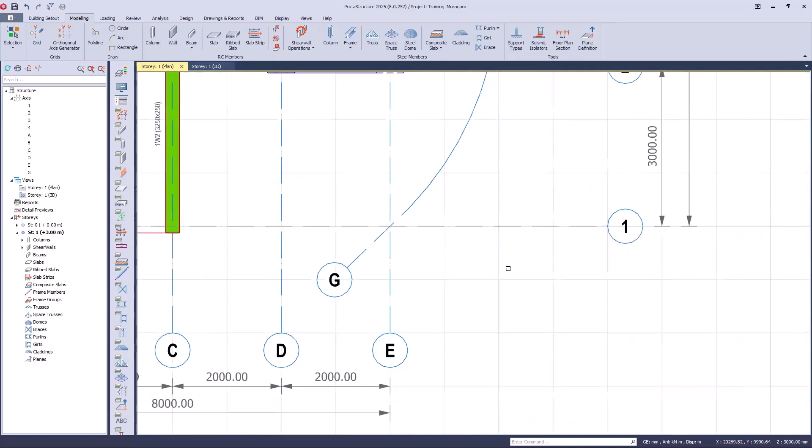So if it is okay, let's go on with the remaining part. I will take shear wall and create another shear wall here. As we have seen for the column, you can extend this shear wall upward or downward. So can you try it? Take this shear wall that you have here and extend it by 2 meters, so it will be 2 meters above here. Can you try to extend the top side of this shear wall to 2 meters?

Right. You remember how we shortened this column? It is the same way, the same scenario, but do it for the shear wall. Try. So were you able to elevate, to stretch upward this shear wall? People here in the room, who were able to elongate it?

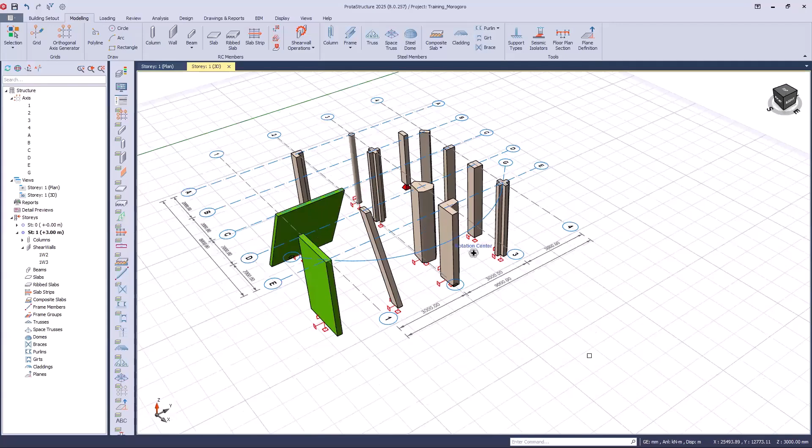Here I see, very well. Yes. Online people, good. So they were able to elevate it. Here physically also a few people did it, but it is the same.

So again, if I open the property of the shear wall, again I have the geometric tab. I have also the general tab and the geometric tab. Okay. So if you use this geo tab, you will have the delta Z. So it's a matter of filling delta Z and elevating the top part. So I'm going to elevate the top part by 2 meters at I, and 2 meters at J.

Then if I click on update, now it will be elongated like this. If I only elevate one part, now I will have this kind of shape. Okay. So you see, you can manipulate it as you want. I may put maybe 1 meter only. So it will be looking like this.

So you can change the I and J end as you wish. You can do the same for the bottom side if that's what you want to achieve. Okay. So I will bring them back to 0. Update. So I will have the normal one like this. Good.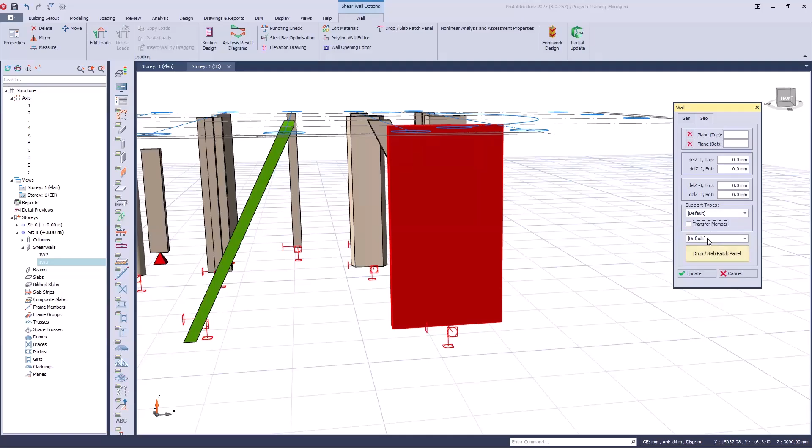So going back to the properties of the wall, the remaining properties are similar to the ones we saw on the column. So if you want to assign another type of support, you can do so. If this shear wall is a transfer member, you can activate transfer member. Okay. Good. Then we have a drop panel. If this shear wall is carrying a flat slab and you want to put a drop panel, then you have to use this. But we will not be able to see it now because you must first have created the slab at the top. Okay, so that's it.

The last thing here is default. You can set the use of the wall. We'll come back to this when we reach the analysis part. Okay. So I think we have covered all the settings for the shear wall as well.

So the last thing we have to see regarding the wall is to create openings in the wall, because maybe if you are dealing with, let's say, an elevator shaft, you have to create an opening for the elevator doors. So let's see how to create openings in the walls. So to create the openings, you can do this in a 3D view or in a plan view. Okay, so you have seen that in ProtaStructure 2025, you are free to model in any view that you wish. Okay, so how to achieve that? Let me do this in a 3D view.

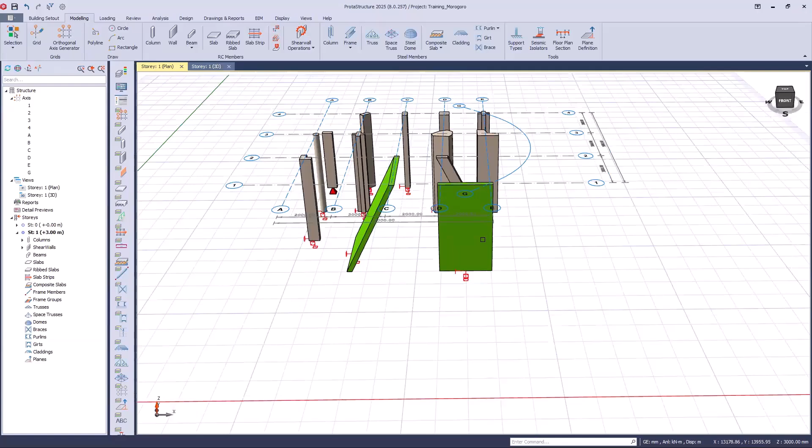If you select a wall and you right click, you will see wall opening editor. Okay, you see wall opening editor here. If you select it, wall opening editor, you have something like this. You can achieve it again by selecting a wall, and here at the top, you will again see wall opening editor. Then again, if you click there, you will be able to see your wall opening editor. Right?

So if you are here, then it's time to create wall openings. So this is just a preview of the wall that we have. Okay, you can see the height and the length of the wall. And for now, it is a solid wall. There is no opening yet here. So to create openings, you have to click on this add button here at the bottom. Okay. Click on this add button.

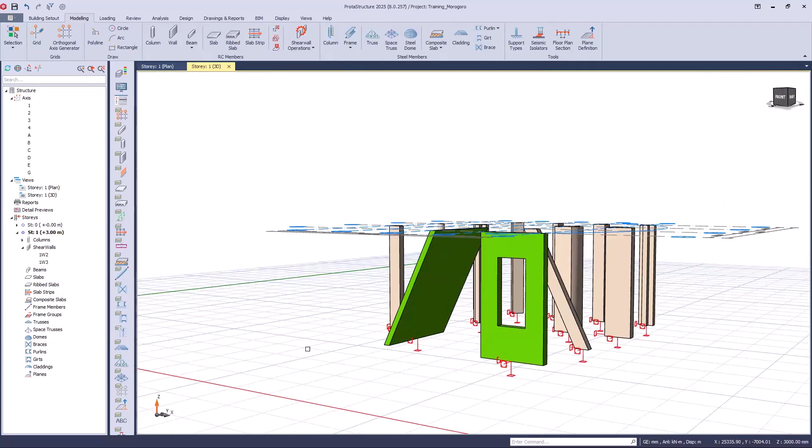Right. Another thing here, you can add many openings. It is not mandatory to have only one opening. So if I want to adjust the openings that I have created, I have to select the wall again, go back to the wall opening editor. Okay, so I can add another kind of opening. Okay, so it's a matter of adjusting this so that these openings are not overlapping.

Okay, so then adjust. If everything is okay like this, click OK. Now we have something like this. So it depends on how you want to model your openings, so you can add as many as possible. So try to add openings and let's see the result. Try.

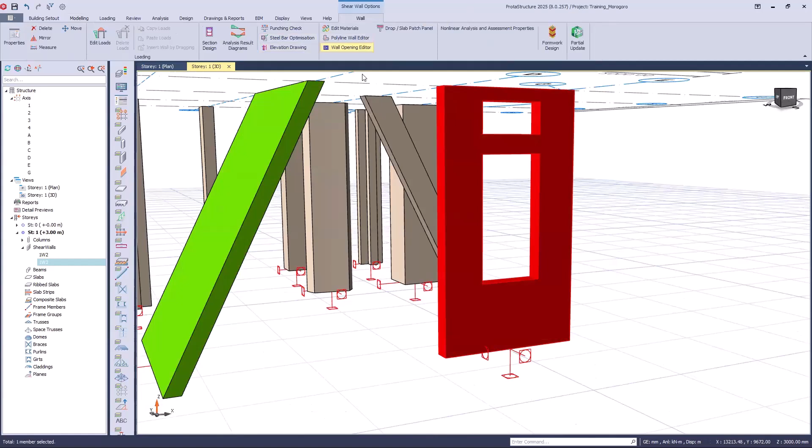So there is a question here in the class. Okay, they are asking on this wall. Okay, so you remember for opening 1, we have put y to be 0. So it was supposed to be starting here at 0. So if I go back to the opening, you remember for this one, y is 0. So it is supposed to be starting where the wall is starting. So they're asking why there is a distance here. Why is this opening not starting all the way here?

Is there anyone with a solution and input? Why is this opening starting somewhere from the base? Okay, is there an input? Okay, so let me explain it so it may be clear for everyone.

When we are modeling story 1, these ground elements here are being modeled with the underground part included. So it means if I select this column, it is from this top level all the way somewhere here, and it is directly connected to the sub column as well. So to show you, if I activate story 0, you see where the grids have moved.

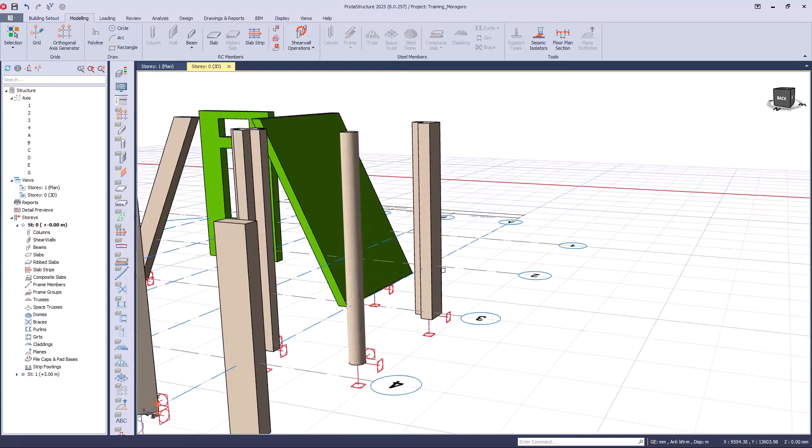So it means here where the grids are, it is the ground level, if I can say. So all the part which is below these grids is under the soil, if it is a foundation part. So if you check well, this opening is lying directly with the grid, which means it is at 0, 0. So the remaining part is the part which is under the soil. It is the foundation part.

So that's why we're seeing it. It seemed like the opening was suspended somehow, but it wasn't. This is the reason behind it. Good. So if you come back to the wall opening, you see it is from 0. All right, any other question?

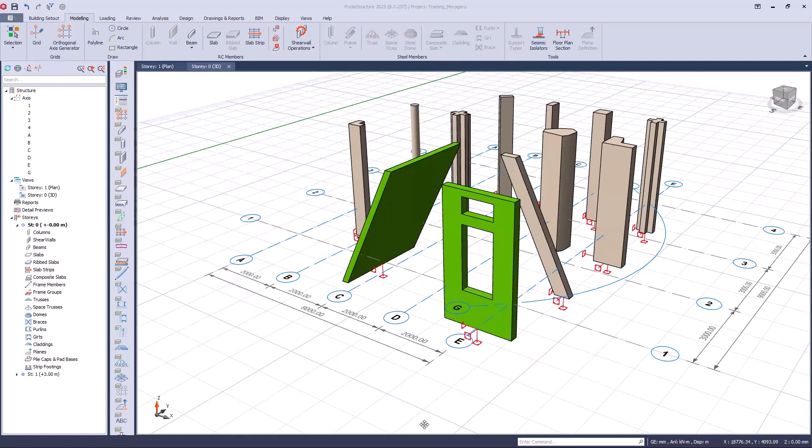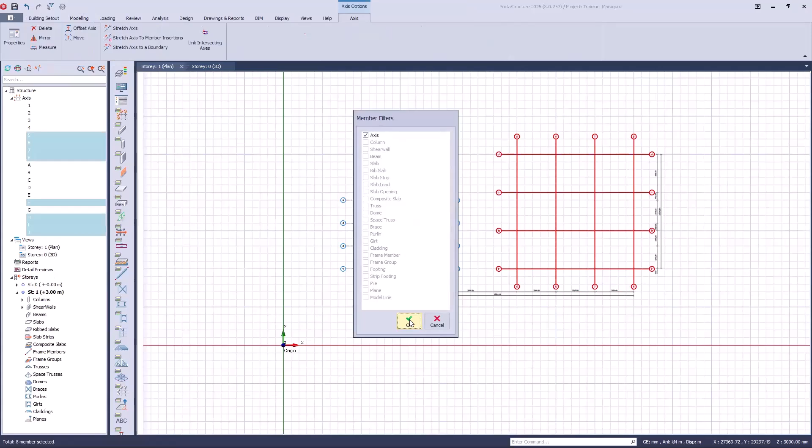Then later on, after seeing how to model grids, we have gone on how to model columns. I've seen how to model rectangular columns, how to model square columns, how to model other type of regular columns, like circular one, this L shape, and so on.

After that, we have seen how to model an irregular shape of column. Then, of course, you have gone through all the settings within the column dialog box: how to set the section of the columns, how to manipulate the eccentricity of the column, how to create slant columns, how to rotate a column.

We have seen how to elongate or shorten the column using the delta Z, and how to create and assign different type of support to the column.

Then later on, we went to the wall, where we have seen also how to create a straight wall as well as how to create a slant wall. Under the wall settings, we have covered every parameter here, even under the geo, the same as what we saw on the column.

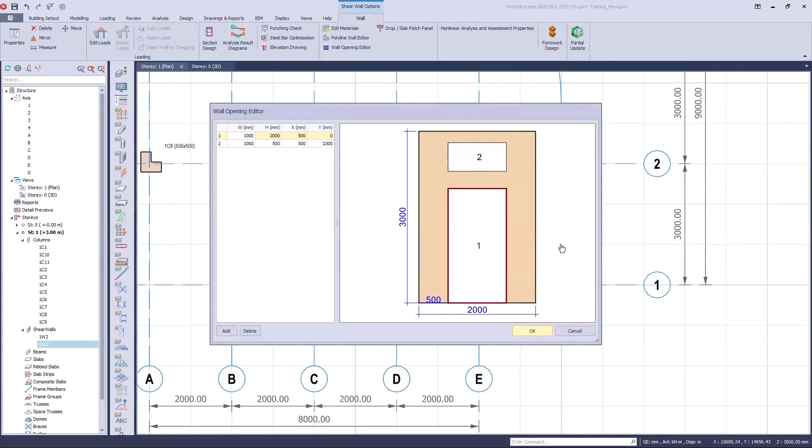In addition to this, we have seen how you can manipulate and insert walls, openings in the walls. So that was what we covered so far, and that was what was planned to be covered today, for day one.

So it is better if you go knowing what we have to cover tomorrow, so that you may have a clear picture of how the training is going on.

So tomorrow we'll cover structural beams in the morning, how to model beams. Then we will go and have a little bit of introduction on the load combinations, because it is very important to talk about it before going to the slab, because in these latest versions of the software, like in ProtaStructure 2025, before starting modeling the slab, you should first of all set the load combinations. So we will see it tomorrow.

Then we will see how to work with plane definitions and modeling staircases tomorrow. Then after lunch break, we will be creating other stories. So remember what we have done today, we only worked with story one. So tomorrow we'll be creating other stories here.

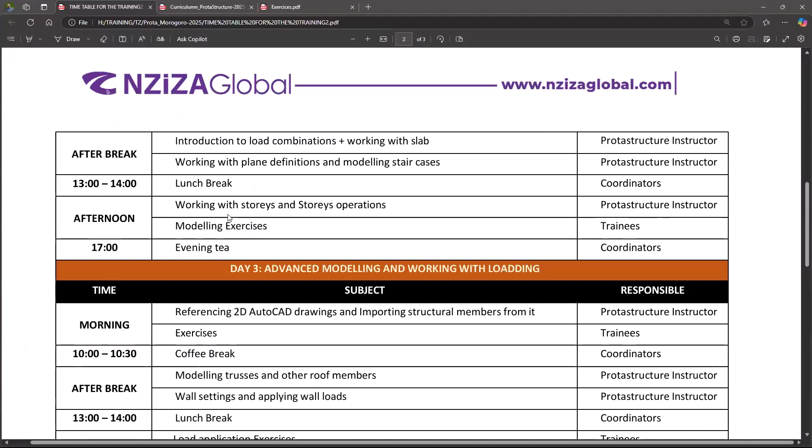So we'll be having modeling exercises if time allows. So that's what we'll cover tomorrow.

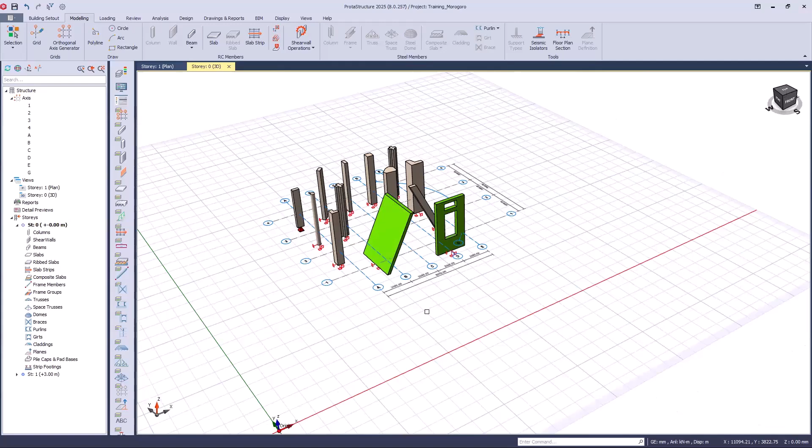That is rotating. Just click the right button, hold, then move, you will be rotating. So if you want to drag, you will have to click and hold the scroll button of your mouse, then drag. Then if you want to zoom in and zoom out, you will use your scroll button.

Good, like this. So shifting from the 3D view to the plan view, you will see these two tabs here. If you are in a 3D view, it will be activated like this. So if you want to move to the plan view, just click on plan, then we will have your plan. So you may have only one, something like this, only plan view, you don't have 3D view.

So if you want to activate the 3D view, go to the view tab here, click there, then you'll be able to open the 3D physical model. If you click there now, you see the 3D will open. The same scenario goes when you have 3D view but don't have a plan view.

Again, you go to the view tab. If you click on plan, now you'll be able to open the plan view. So if both are open, then you can navigate from one window to another.

So if you want to tile view, it means you want to see both views at the same time. It is again under the view tab here, then you have to tile. You can tile horizontally to have the 3D view on top and the plan view on the bottom, or tile vertically to have one on the left and another on the right.

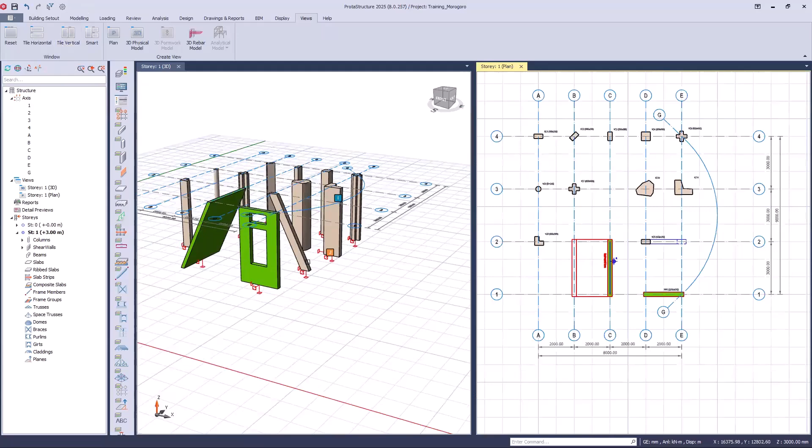If you want to reset everything, you can use this reset, and again you will come back to these two windows like we had before. So that's the navigation.